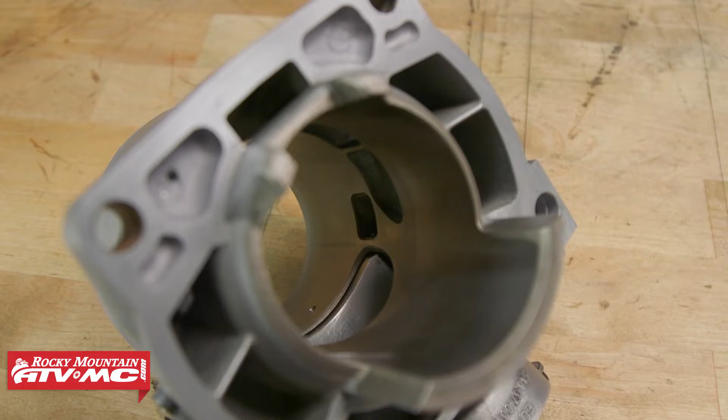As you run your motorcycle, the piston and cylinder begin to wear out, and this wear is the main reason why we throw in a new top end. Today I'm throwing in a new top end on a KTM 300XCW. When we tear down our motor, it's essential that we measure the bore of the cylinder so we can verify it's within spec and order a stock size piston. If it's not within spec, we may have to take a different route. Today I'll show you how to properly measure the bore of your cylinder.

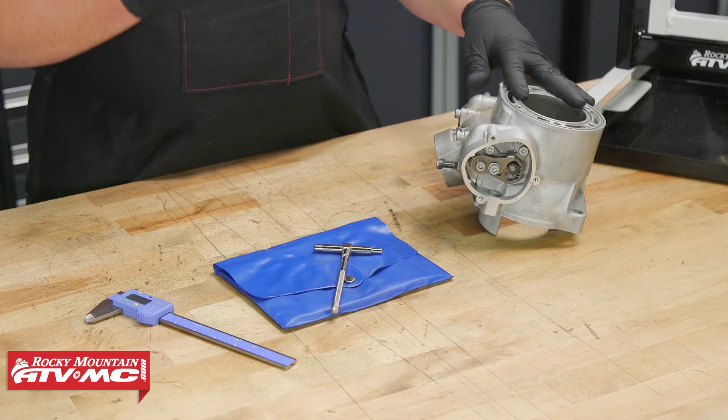The first step in measuring your cylinder is to have it off the bike and completely clean. We don't want any debris getting in the way of our measurements. Second, we'll need a few tools: a telescoping gauge set and some calipers for measuring.

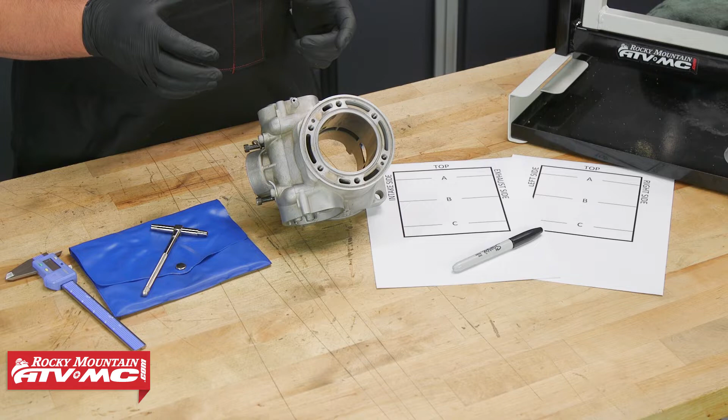As we begin our measurements, there are 6 total measurements we need to take, known as X and Y measurements. To begin our X measurements, we measure from the intake side to the exhaust side, taking 3 different measurements: at the top, middle, and bottom of the cylinder. We have a paper here to help represent and keep track of our numbers. Our Y measurement will be from left to right, and we'll measure the same at the top, middle, and bottom, again using our paper to keep track.

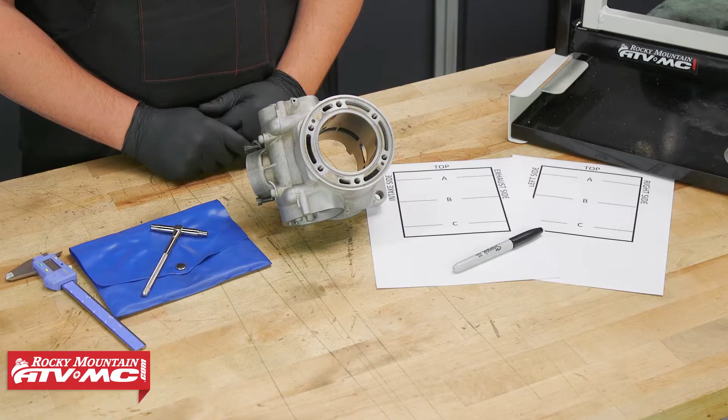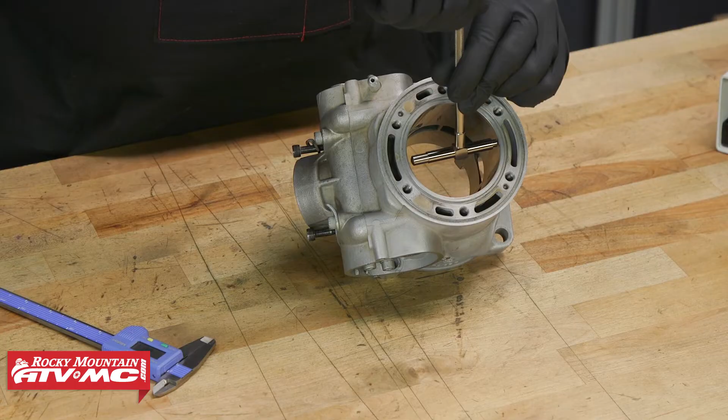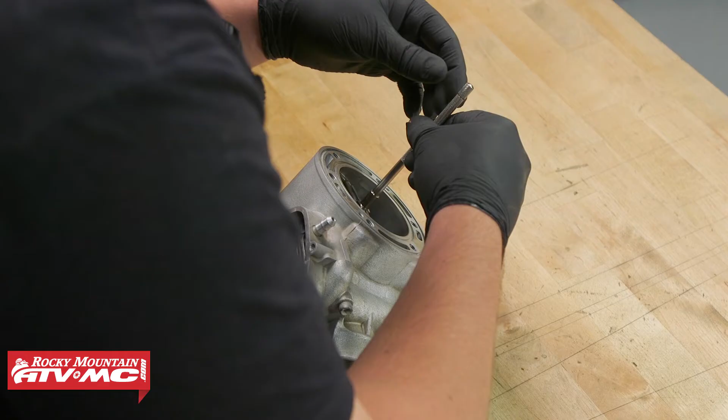Now we're ready to start our first X measurement, from the intake side to the exhaust, starting at the top of the cylinder. We'll take our gauge, insert it into the cylinder, and loosen up the back side. To find an accurate measurement, we need the gauge perpendicular to the cylinder, finding the widest point. An easy way to do that is to move the gauge back and forth to find the widest point. We can then tighten down that gauge, pull it out, and measure it with the calipers, then write it down on our piece of paper.

Moving on to the middle measurement of the X-axis, this may be a little tricky, especially with 2 strokes, because we have ports in the center of the cylinder. What I like to do is take my gauge and measure directly above the ports. If you want, you can measure below the ports, and to be safe, you can take both measurements, above and below. We'll take that measurement and write it down, then measure the bottom of the cylinder and write that down too.

Now that we have the X measurements, we can work our way down on the Y axis. Again, this is from left to right, and we'll take those same 3 measurements at the top, middle, and bottom of the cylinder.

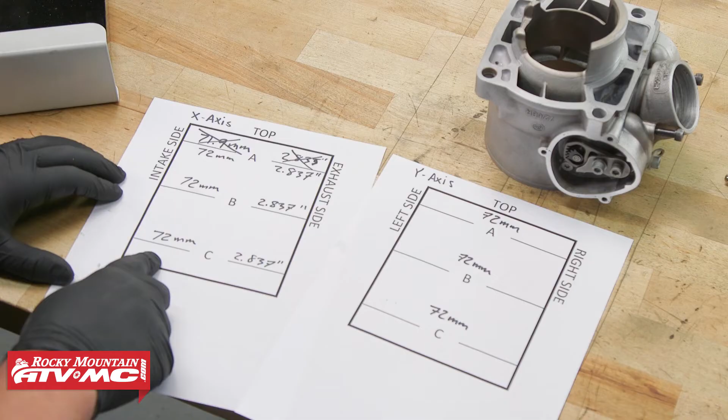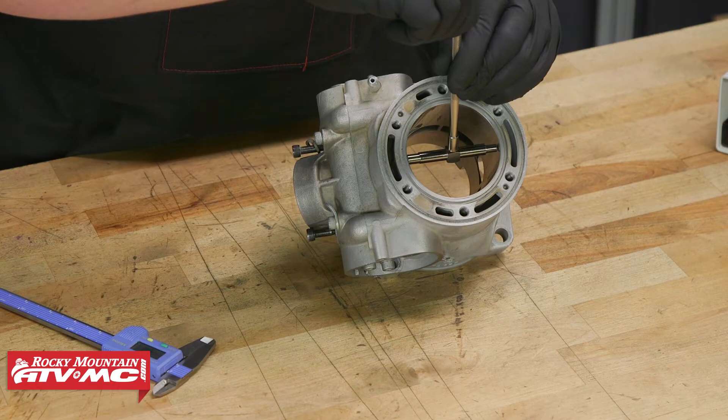We've taken down the 6 measurements of our cylinder, and as you can see on the X axis I wrote down both millimeters and inches. Most service manuals give both measurements, but for our case we'll stick with the metric version. All the measurements came out to 72 millimeters except that first measurement. I went back and rechecked it, and it was actually a true 72 millimeters. This is a great reason why you should always write down the measurements, to check for any discrepancies.

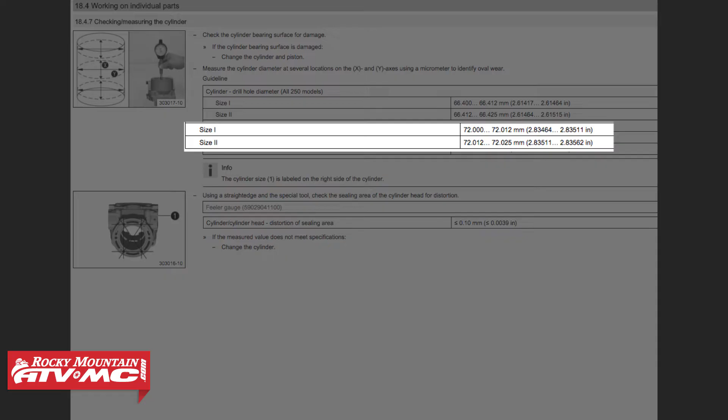Now that we have all this, it's time to go to our service manual and check our cylinder wear limits and piston to cylinder clearance. Now that we've checked it, we know this cylinder is in spec. The spec for this machine is between a 72 millimeter bore size and 72.012 millimeters. Because this is in spec, I'm able to order any OEM or aftermarket standard bore size piston.

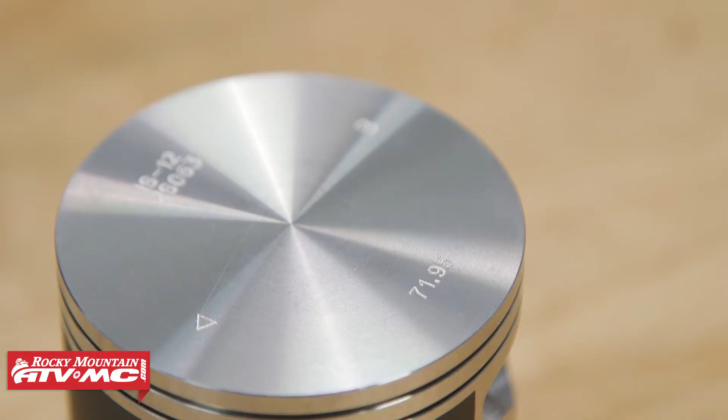If your cylinder has a lot of hours on it and is slightly out of spec, you may be able to fix that. Some OEM manufacturers offer OEM pistons in different sizes on their diagrams, and some of those sizes may fix the piston to cylinder clearance. However, if your cylinder is out of spec, it does need to be replaced, or another option is to have the cylinder bored out to fit an oversized piston.

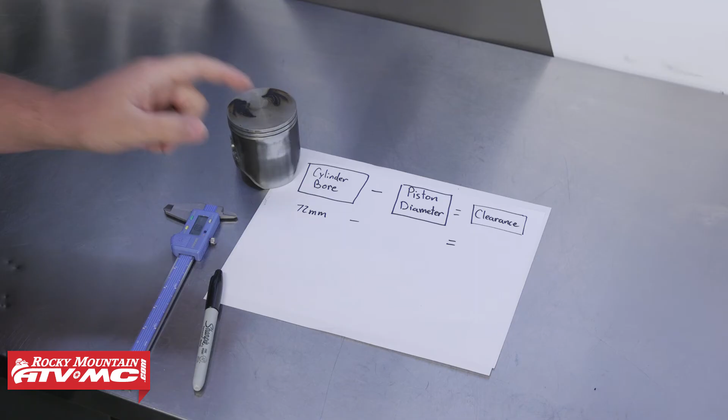We now have our cylinder bore at 72 millimeters, and our final step in finding our piston to cylinder clearance is measuring our piston diameter. Once we have this measurement, we can subtract it from the cylinder bore and we'll have our clearance.

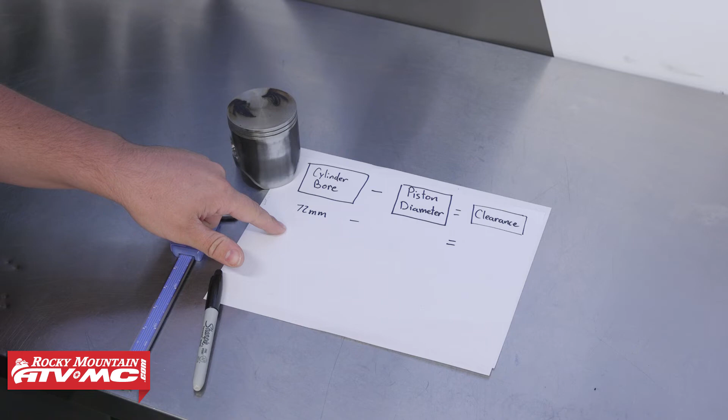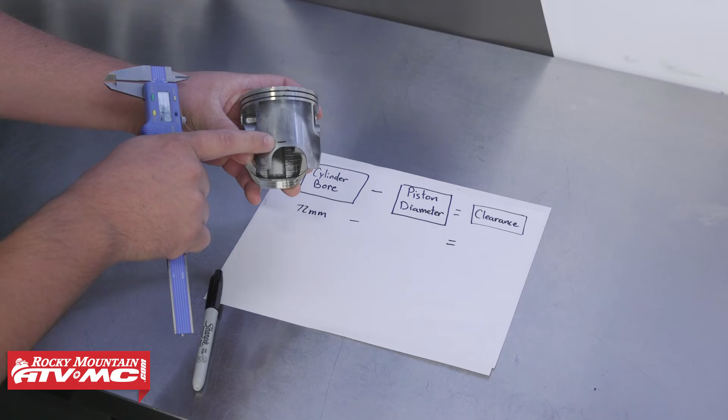To properly measure our piston, most manufacturers recommend measuring on the skirts a short ways from the top. On this piston, KTM recommends measuring 50 millimeters from the top, and I've put a mark where I need to measure. I'll take this measurement and then we'll write it down.

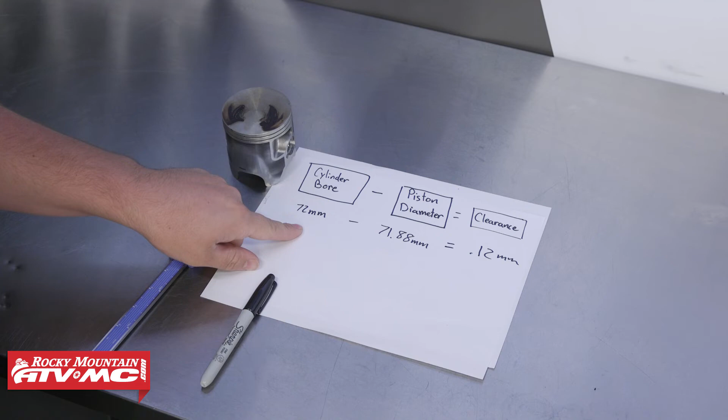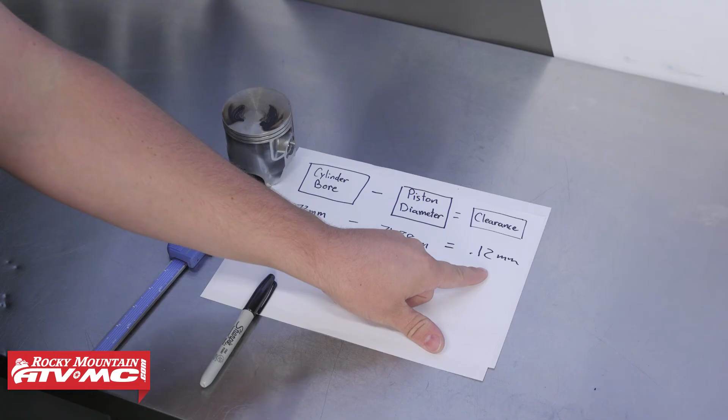The measurement we got from our piston is 71.88 millimeters. After subtracting that from our cylinder bore, our piston to cylinder clearance is 0.12 millimeters. The service limit on this bike is 0.1 millimeter, so unfortunately we are out of spec and do need to throw in a new piston to get the proper piston to cylinder clearance. But be sure to check your service manual for your proper specs.